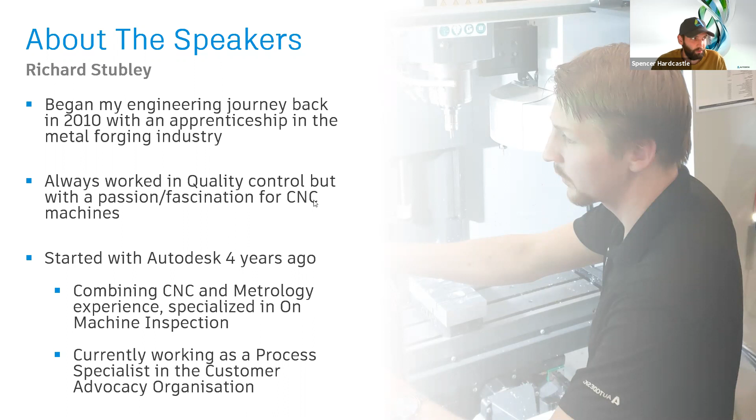Thanks, Richard, really interesting background there. I'm sure some people have some questions for you later on. Let's pass it over to Paolo for a little bit of background on you.

Saving the best for last. My background is not that dissimilar from Spencer's - as he mentioned, we pretty much joined together. I joined Delcam in 2014, and subsequently we were acquired by Autodesk, so I've been working for Delcam slash Autodesk for, I'm just coming up to 6 years, and I think Spencer as well. So we're about a week away from our 6th anniversary.

I've worked in several roles. I joined the graduate scheme after graduating at the University of Manchester - I was already in England. For those wondering why an Italian ended up in Birmingham working for a CAD/CAM company like Delcam, I studied in Manchester for my master's degree and then moved a couple of hours south. I landed a job in Birmingham, graduate scheme first, then started working as an applications engineer in the international support department, mainly focusing on PowerMill and at the time, Netfabb.

With the reorganization, we ended up concentrating our focus on Fusion 360. That's my current role, like the other guys on the call - I'm a process specialist in the Customer Advocacy organization, mainly focusing on Fusion, a bit less on the inspection side. Richard focuses a bit more on the inspection side of things. Okay, so that's a little bit of background.

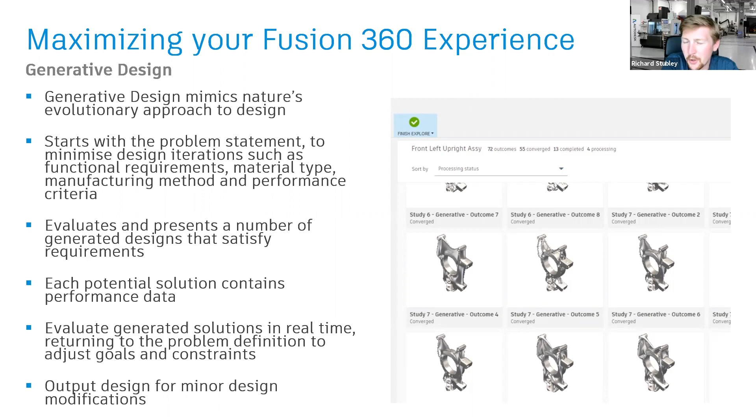So as I said, a little bit of a workflow linking Fusion 360 and PowerMill here. You probably have heard of generative design within Fusion 360. If you haven't, it's all over the place. It's going to change the way we design and make things in the very short term future. Generative design is a technology that mimics nature, and how things evolve in nature.

What we start with is the user setting, pretty much creating a problem statement, saying okay, what is the thing I need? Am I going to design a chair? Am I going to design a bracket? Am I going to design, I don't know, a mold or whatever else? And then the user has the option to tell the software what material he wants to use and what manufacturing method he wants to use.

So say I want to machine this thing. I've got the option of titanium, Inconel, brass, aluminum, whatever else, but I really want to do it with milling, for example. I really want to do it on a milling machine.

And on top of that, we need to define what the performance criteria are. Again, if it's a chair, really it only needs to withstand the weight of a person, while if it's a bracket, it may have some mechanical requirements, some physical requirements it needs to meet.

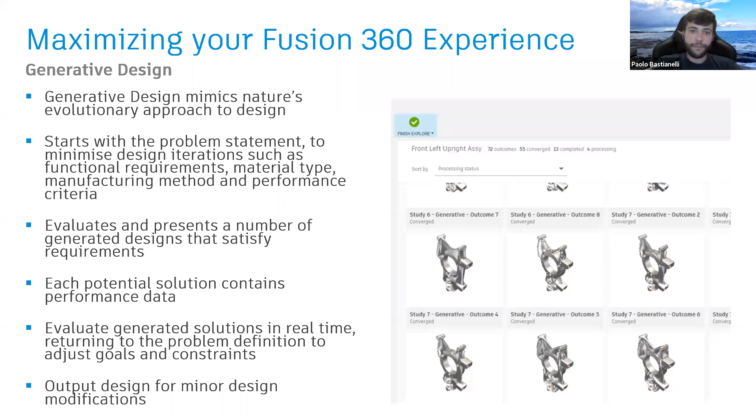So if you want to go to the next slide, Spence. Thank you. So if we look at a part like the one you can see on the right hand side of the screen, that looks quite freeform. There are some areas that are machinable quite easily in 3 axes, but some areas are really not machinable in 3 axes. It's a very organic shape, very freeform, and this is where PowerMill comes in to help.

For those of you that don't know PowerMill, PowerMill is a high-end expert CAM package that includes a vast library of roughing and finishing strategies. It's really marketed at those users that need to machine complex parts.

So what is this going to give you? If you pair generative design with PowerMill, basically with a greater choice of toolpaths, with more flexibility, more efficiency when machining your parts, you really end up with a toolbox that includes advanced tool axis control, full 5-axis collision avoidance, and a series of other expert tools within the software that will make sure you can machine complex parts in a much easier and much more efficient manner.

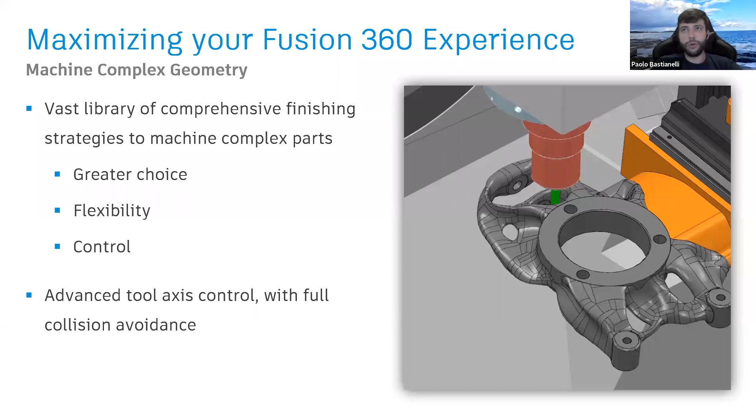So if we want to look at how the 2 software really combine and really work together, there's a little video, just less than 2 minutes long, I promise, nothing too boring. If you want to go to the next slide, Spence.

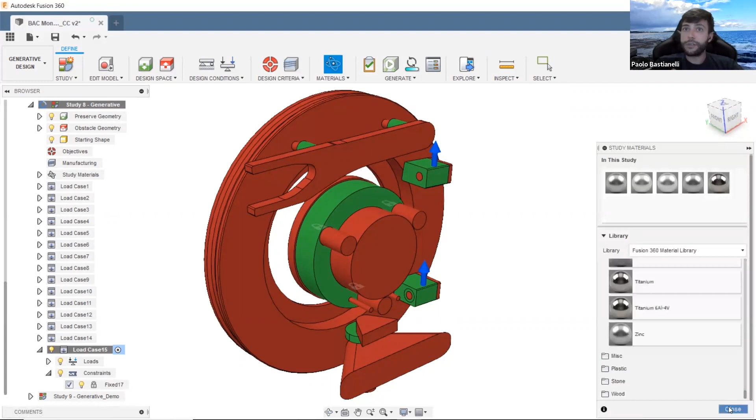And then all you need to do is click Generate Study, and the software will automatically spit out all of these outcomes, all of these solutions that are all going to meet the manufacturing requirements. They're all going to be available for the user to look at individually.

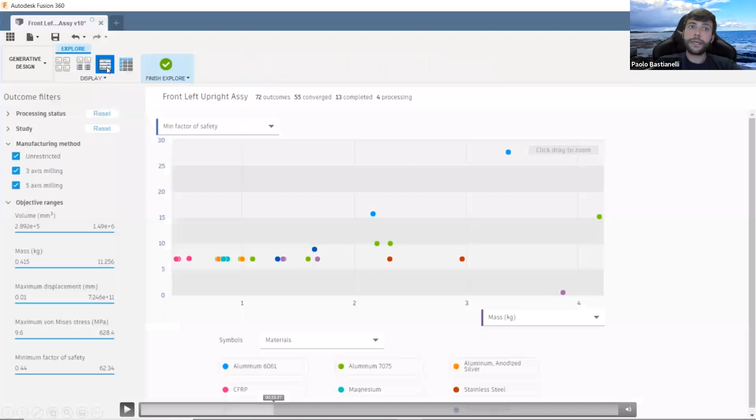Oh, and again, okay, let's play that. Apologies, technical difficulty.

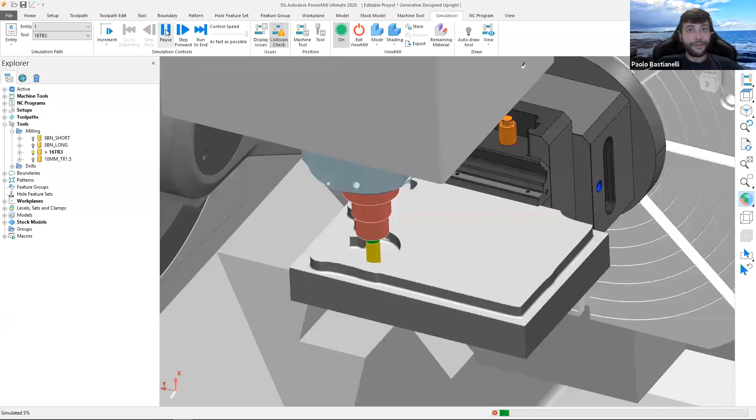There we go. All of them with their manufacturing requirements, all of them with their weight, volume, and all physical properties that you may need. The software will allow you, as you expect, to output the part. And now we look at PowerMill, okay? A complex shape like that in Fusion, I'm not saying you cannot do it, but you'll probably struggle a little bit with the current functionality. Don't worry, we're catching up, but with the current functionality, we can't.

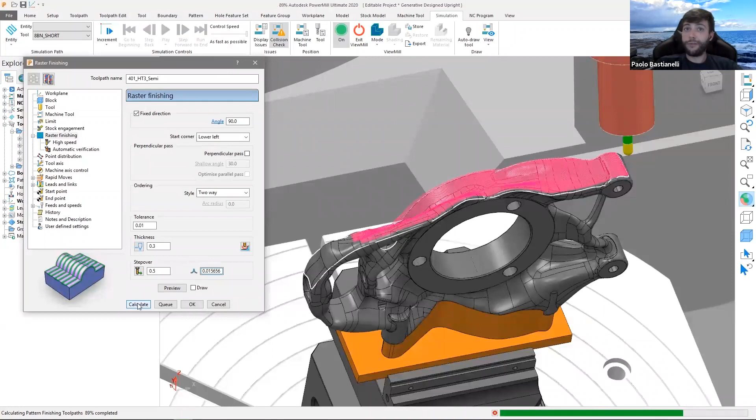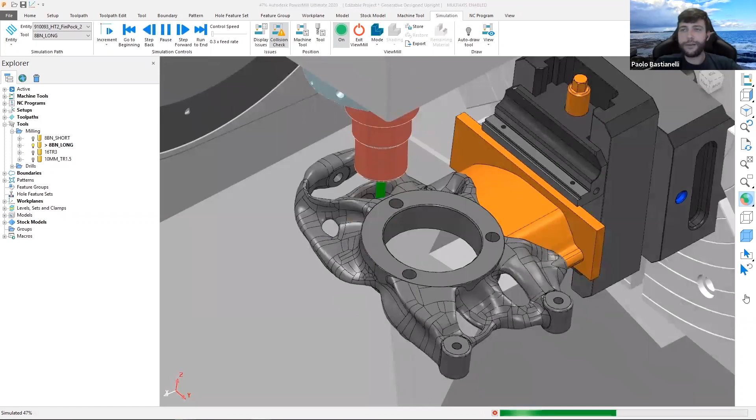If you've seen PowerMill, full machine simulation, full 5-axis control, automatic collision avoidance. Now, to give you a better link between the 2 software, we have just implemented automatic collision avoidance within Fusion 360 just for steep and shallow. For those of you familiar with PowerMill, you may remember steep and shallow as one of the flagship toolpaths within PowerMill. We've implemented it in Fusion as well. We have included automatic 5-axis collision avoidance for that.

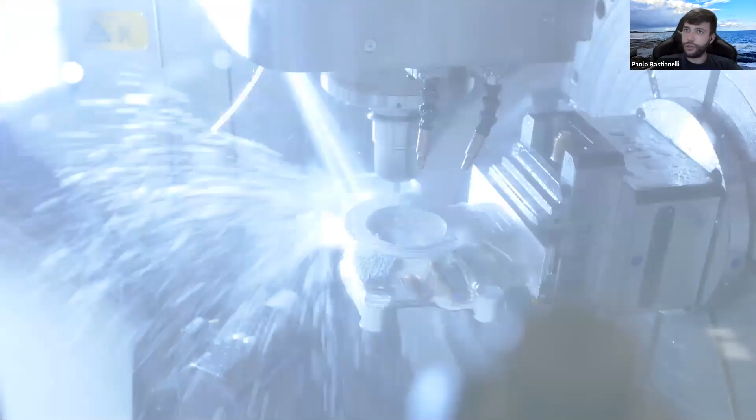But again, in PowerMill, you're probably looking at doing it in a bit more of an easier and more intuitive manner. Now you can also see the actual machining of this. Everyone loves some machining footage, some coolant and some swarf flying off. But just to give you a bit more background, we have actually machined that component in the Birmingham Technology Center. So we're not just talking about software, we've actually machined the component. We've actually evaluated the physical requirements of the component and realized how much lighter than the original upright it was.

Okay, I promise I'm going to shut up now. I spoke way too long. I'm going to leave you in the other guy's capable hands. Do we have any questions about this in the chat? No questions about this, Paolo. Thanks so much. That was a really interesting workflow there, combining those 2 technologies.

We have another question about tool libraries, in particular turning tool library functionality. Dave wants to know if you can create custom turning tools. I'll stop typing my reply and might as well say it now. So as far as the custom tool holders go, I know that is being actively worked on. So that is in the pipeline. The same with custom milling tool holders and custom turning tool holders. That is definitely something that is on our roadmap and we want to implement.

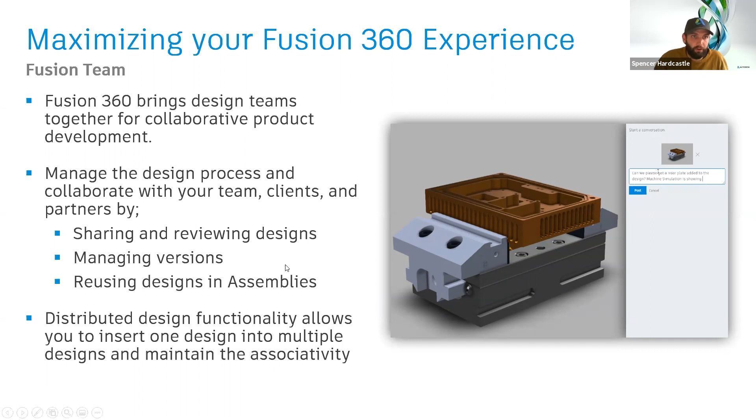This workflow we're talking about now is linking Fusion Team to FeatureCAM. On the FeatureCAM side, for those that haven't used it, it's a feature-based programming software aimed at production run parts. On FeatureCAM, we've got full machine simulation and the ability to embed your machine's capabilities virtually, which allows you to improve your safety and your programming confidence by confirming that there are no collisions, and that you avoid any unplanned downtime on the machine as a result of these possible collisions.

It allows us to verify your parts for things like collisions and near misses, and identify problem areas early before we actually send to the machine. Machine time is money, software time not so much. This allows you to then adjust your work holding, maybe use alternative tooling, and really gives you an insight into the machining interface before actually sending any code to the machine.

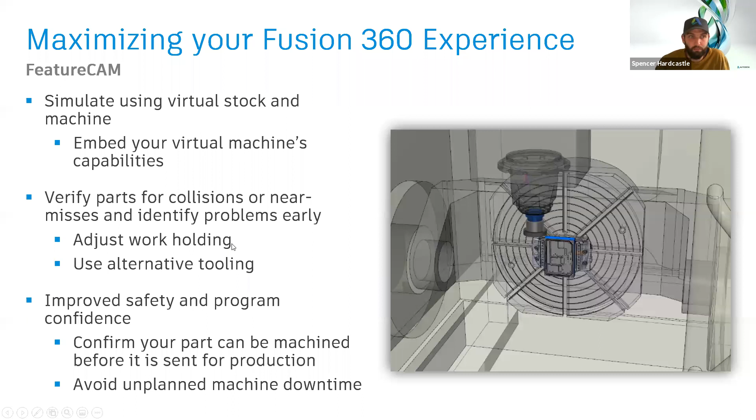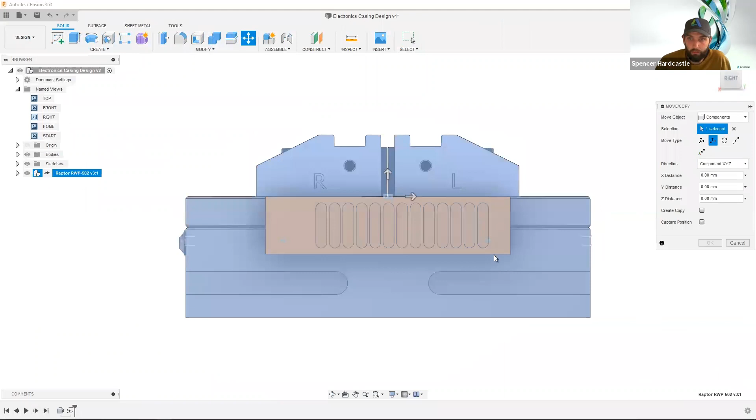So let's take a look at a simple workflow. We start in Fusion, and we've got a part file. Like I said before, we're just going to insert our work holding. In this case, it's a vise. We're happy with the way it's come in, but now we just need to position it in the correct place, again to give us an accurate representation of our machining experience. So I'm going to utilize some of the assembly capabilities inside Fusion to position those jaws exactly on the edges of that part.

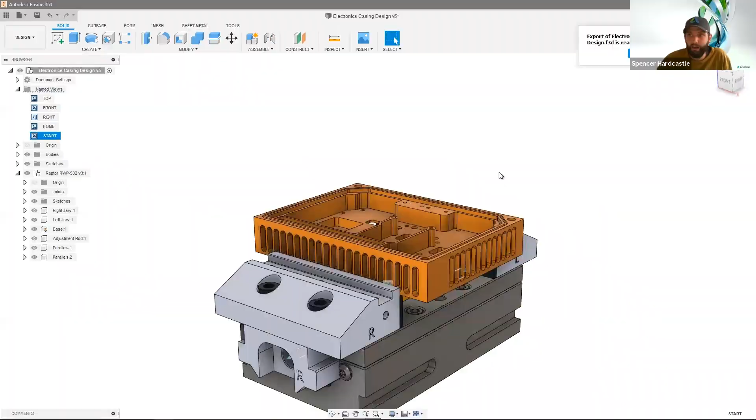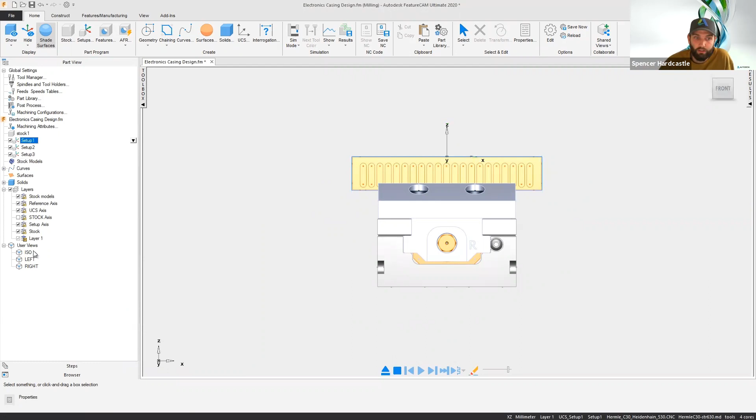At this point, I'm going to export from Fusion as an F3D. The F3Ds can be pulled directly into FeatureCAM, so there's no need to use a STEP file or anything like that. Here's my part in FeatureCAM, and the first thing I'm going to do is create some setups, one on each side of the part: top, left, and right. The reason I'm doing this early on without programming any toolpaths first is I'm going to utilize the automatic feature recognition capabilities, which will recognize features on all three of these setups in one wizard.

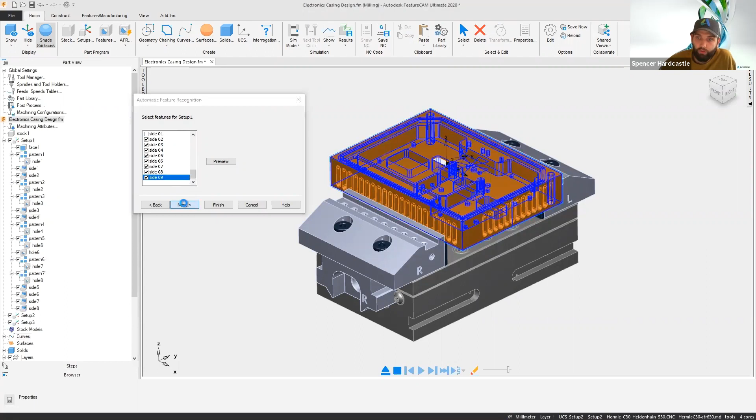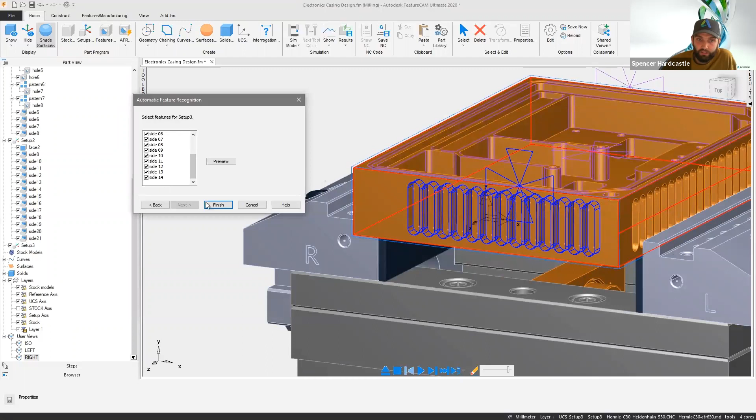So there you go. At this point, it's recognized all of these features, series of holes, series of side features, and it allows you to deselect any that you don't want to program. In this case, I've deselected the run around the outside of the part for a couple of reasons. One is we're going to face off on each side anyway. The second is, if we run around the outside of this part, we're going to collide with our jaws. Move over to setup 2, choose the relevant features, and finally setup number 3, again deactivating the unnecessary features. At this point, we can press finish, and as you can see, it's automatically added all our features.

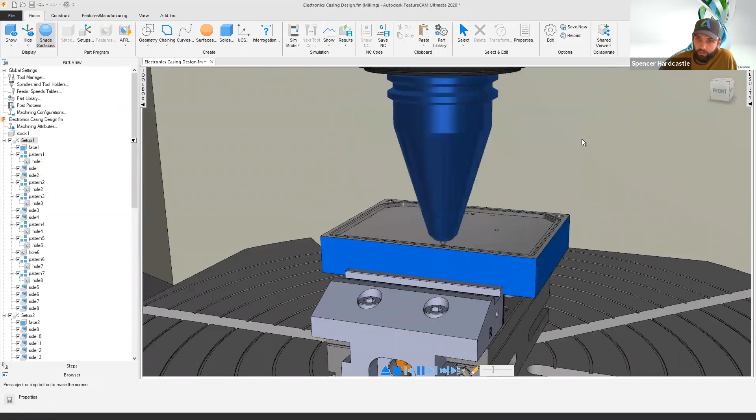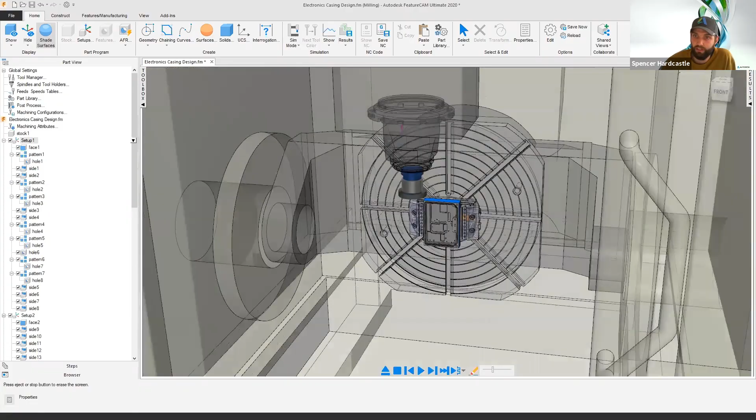Last thing I need to do is add our solids as fixtures, or clamps, as they call it in FeatureCAM. This will allow us, when we run our simulation, to also include those solids and collision check against those. Now you can see we're running this full machine simulation, making sure that all of the parts are machining in a safe and efficient way. All of a sudden, as we rotate our part to perform the second setup, we're running into a bit of a collision. I'm rotating the view to see where that collision is, and it's a collision between the head and the table.

So now let's fire up Fusion Team. This is in a browser. You don't need any software to do this.

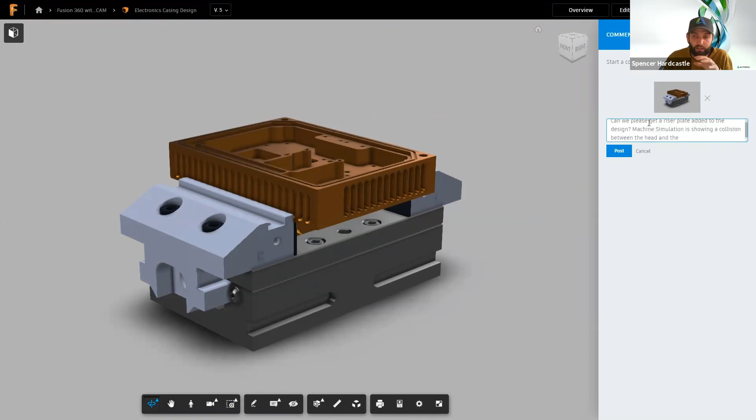So the FeatureCAM user can jump on the browser and he's going to go ahead and add a comment. This comment is, can we add a bit of a riser plate? Because what we want to do is actually move this part away from the machining table in order for our head to have enough clearance to machine those features that you see on the side.

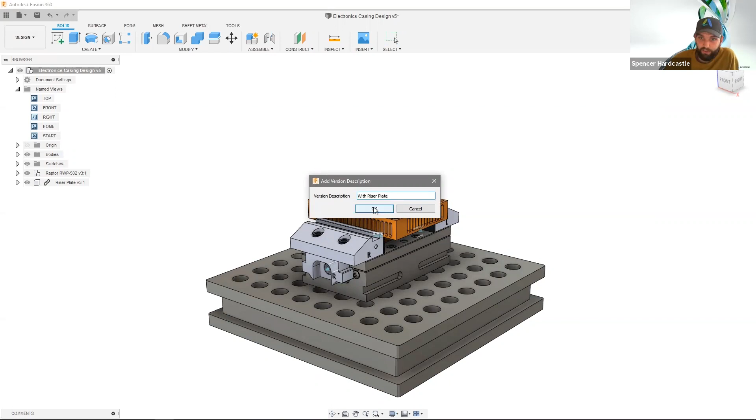So again, instead of designing one from scratch, I'm just going to bring one in, position it to the correct location, and again, export this as an F3D. Now, when we go back to the FeatureCAM side, we can just replace the F3D and all of our features will still stay there. We'll just get this added riser plate on the bottom of the component.

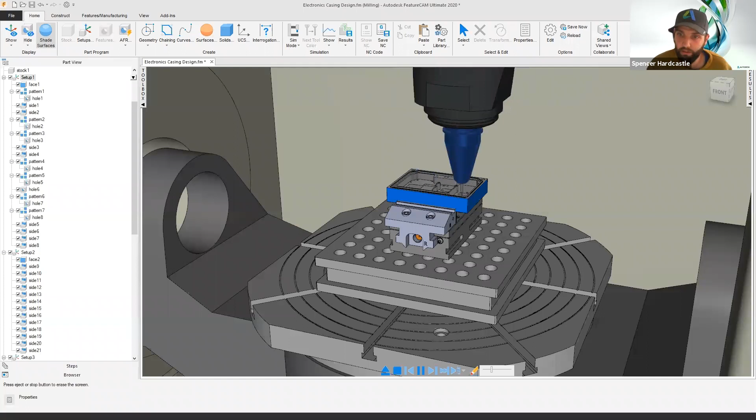So again, we'll run another full machine simulation. Let's go ahead and zoom in through those lovely machine doors. And you can see we're simulating all the features again on the top of the component, just as we did before. No real change to this particular setup. But as you can see, as we rotate to setup 2 and setup 3, we're now collision free.

And so at this point, I can go ahead and save my NC code, transfer it over to the machine, and I'm significantly more confident that this is going to run on the machine first time collision free. And so again, that was just a bit of a workflow that goes through a combination of Fusion 360 alongside FeatureCAM.

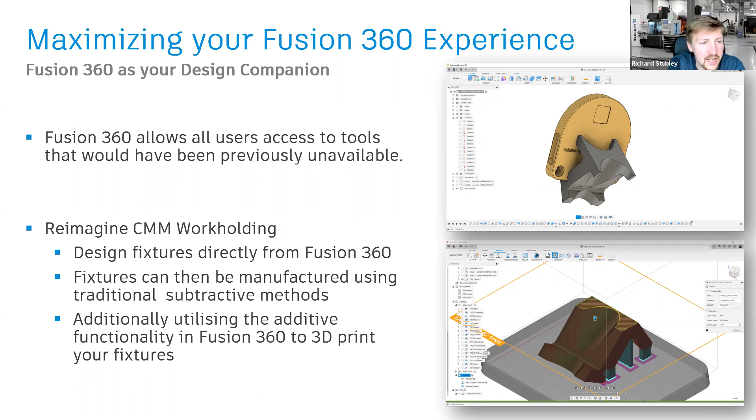So what else can you do? Hopefully everyone out there knows about the probing in Fusion 360. I never stop talking about it. So if you don't know about it, where have you been? But we have got some limitation in the reporting functionality of Fusion 360.

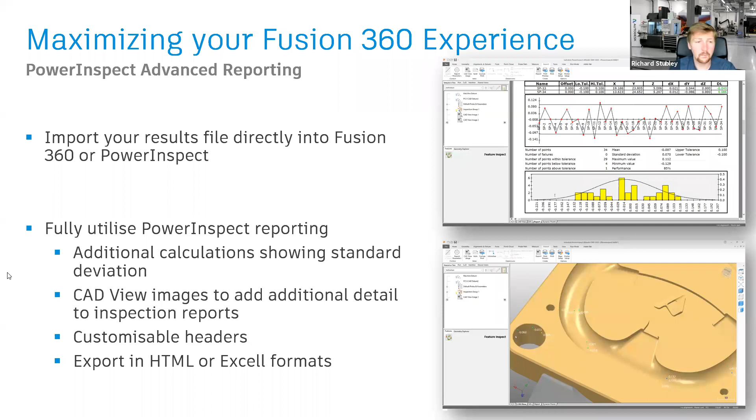But what we can do is use the Fusion 360 product to create the inspection sequence, run that on our machine tool, we can import the results file into Fusion, but we can also import that results file directly into PowerInspect and use PowerInspect's advanced reporting capabilities. So you want to hop forward onto the video, Spence?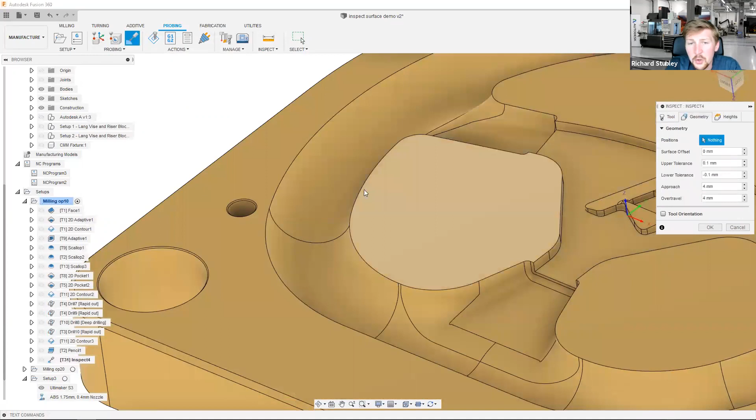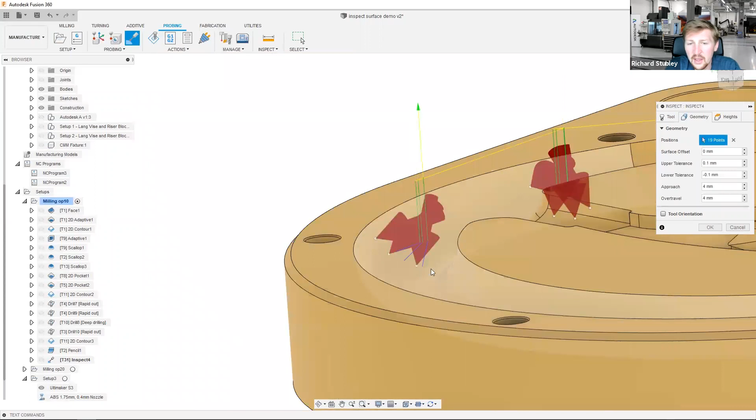You just choose your tool, you click on a point, and then we dynamically put that point at what we call the surface normal. So this means you don't get any skidding because we're always approaching at that surface normal. So I'm going to put a load of points at segments across this mold tool, and it's going to hopefully check for me that my toolpath has worked, that I've got a nice mold tool that is all correct specification.

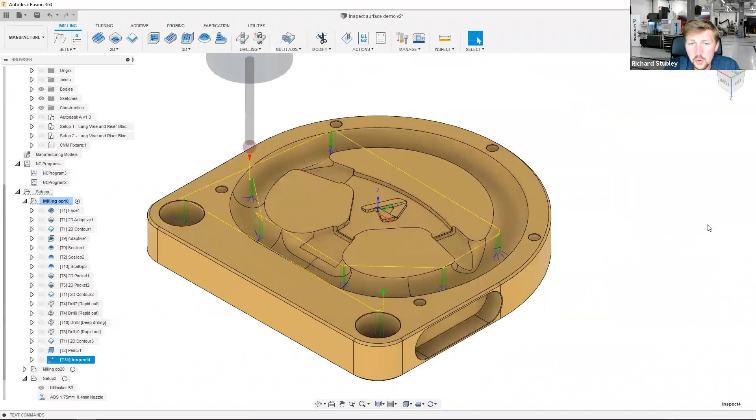So I've got all that in place. Now I'm going to put a couple of points in these holes as well, just to make sure that everything's well and good with those. And what I have to do now is I have to create the NC code, run this on our machine tool, and then our machine tool kicks me back a results file. So we're going to create the NC code here using NC programs.

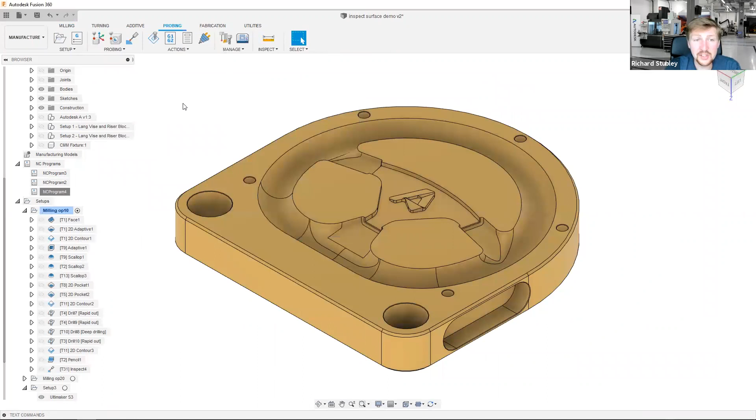That's going to create the results file for me. And then I'm going to import that back into Fusion. So this is run on the machine. The machine has inspected the part. It's made a results file. And then this is the results file that we are loading back into Fusion 360.

Spence, do you want to grab that question? Yes, I do. I was just typing the answer.

So the question from Elaine is: I logged in late, my apologies, but is the intent to integrate or include FeatureCAM into Fusion 360, or will it be kept as a separate product? So I'm going to say about 6 months ago, the products were aligned from a sales perspective into a single offering called Fusion 360 with FeatureCAM.

Now, the idea behind this and the intent behind this was to offer more value, not only for the current FeatureCAM users, because now they get access to significantly more software, but also to give value for any new users who want to purchase an offering that combines, like we said, these series of product offerings.

Now, these products are separate. They are not embedded together. So if you purchase a Fusion 360 with FeatureCAM offering, you will get access to both of these products as separate offerings. And so, yes, they are combined in terms of a sales perspective, but no, they are very much separate products.

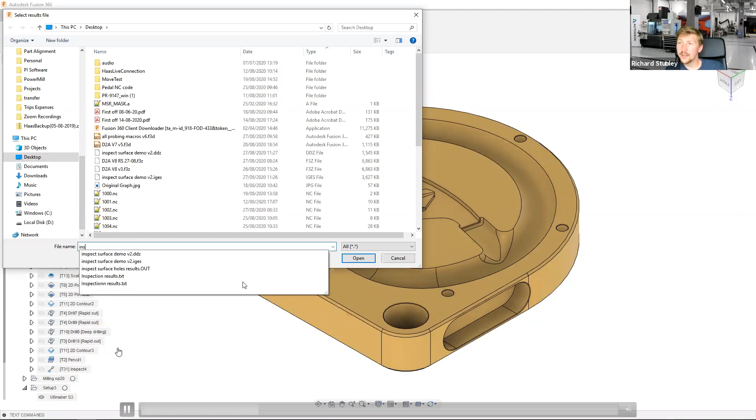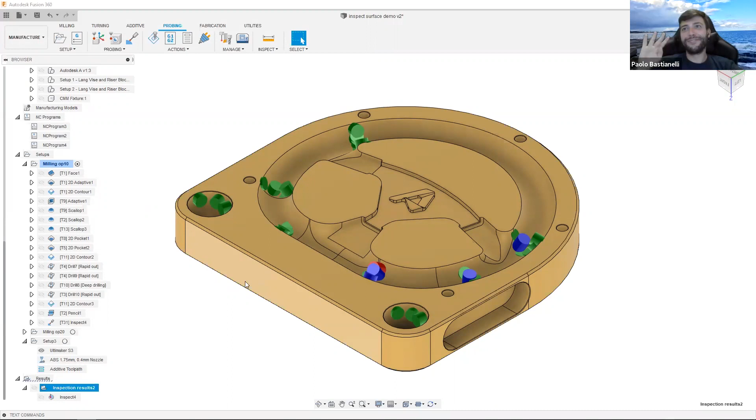Oh, 1 second. Spencer, what are the chances of England taking the Ashes this year, as they're going to stay at home where they belong? Go Australia. To be honest, I don't want to get into a debate really on this webinar, but we'll just see what happens. Let's let things play out before we start assuming where things are going to go home or not. Or you could be Italian and know very little about cricket. Or any decent sport for that matter. Mate, 4 stars on the jersey. Never forget when it comes to football. 4 stars. How many rugby ones have you got? Doesn't matter, does it? I'm going to say go England, because we've got 1 minute left, Rich.

Yeah. What you can see there very quickly, we've got the inspection results back into Fusion. So that is what we've got there. We've got a really nice table to show us the deviation of those points. So, we've probed it on the machine, we've got the deviation back, we can see it in a table. We can also export this into a PDF report.

So we can export this into a 2D PDF. But unfortunately, that PDF is pretty static. We can't do much in the way of editing that PDF. But what we could do is bring this back into PowerInspect and utilize all of PowerInspect's advanced reporting capabilities as well. So again, slightly run out of time for that.

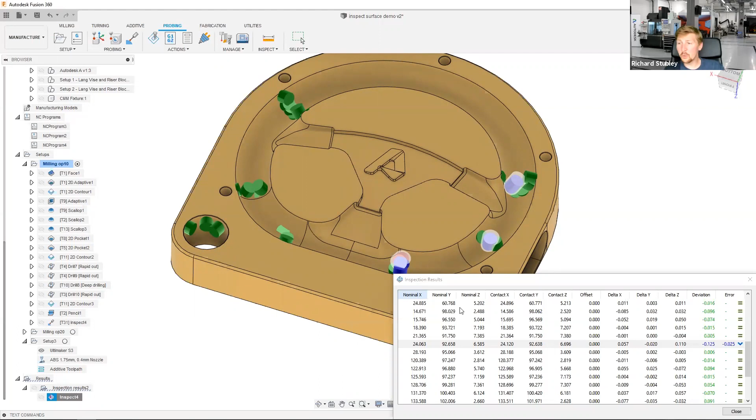We cannot hear you, Spence. Spence, we can't hear you. Perfect. As always, I was on mute.